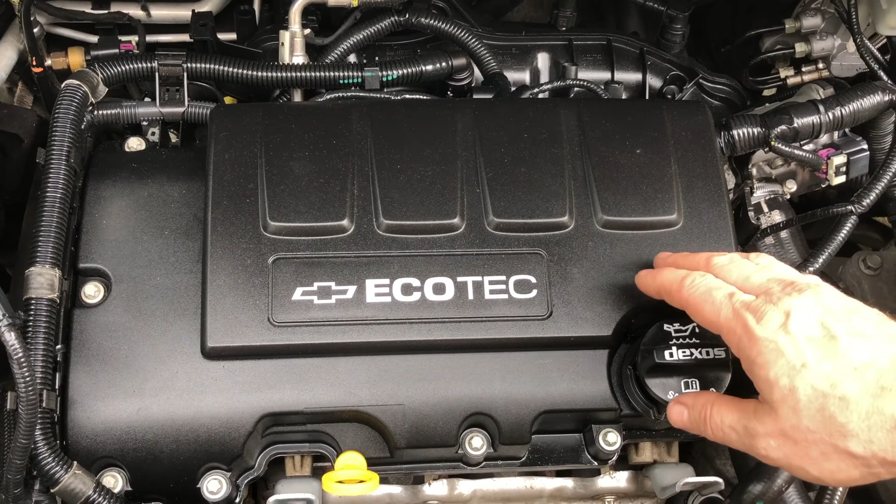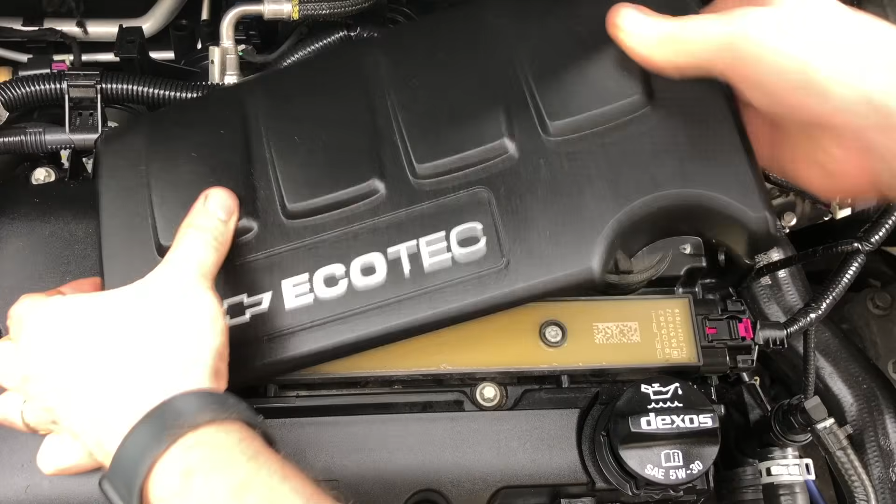All right, guys, today what we're going to be showing is the 60,000 mile maintenance interval on the GM Ecotec 1.4 liter turbocharged I4 engine. So most of that is about the ignition system. We're going to remove this decorative cover. It just snaps off. There's 2 snaps here and 2 snaps here. Hold on to these pins in these positions.

And then we're going to remove the Torx bolts that hold in the ignition coil pack. I believe those would be a, let's see, I want to make sure we got the exact size here. Yeah, that's going to be a T30 to remove that.

I believe this is probably the first time this particular engine has had this maintenance performed. It wasn't done at the correct interval. Once we remove these 2 guys, then we're going to remove the coil pack from the spark plugs.

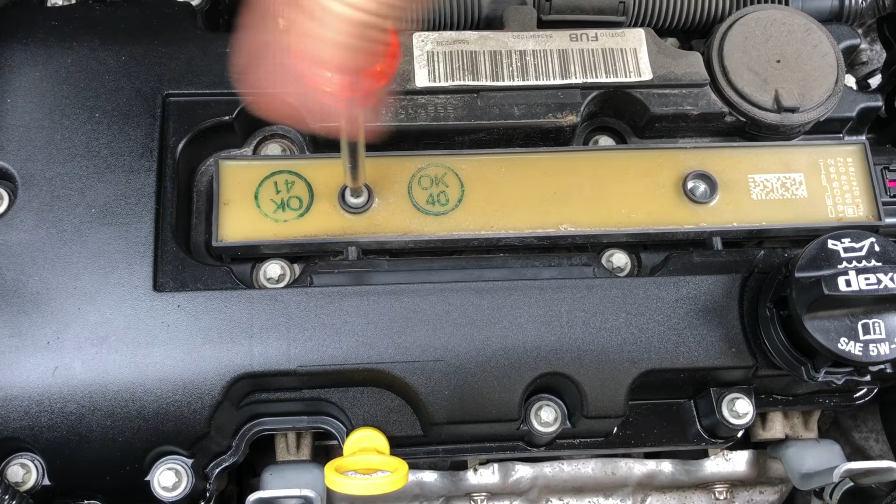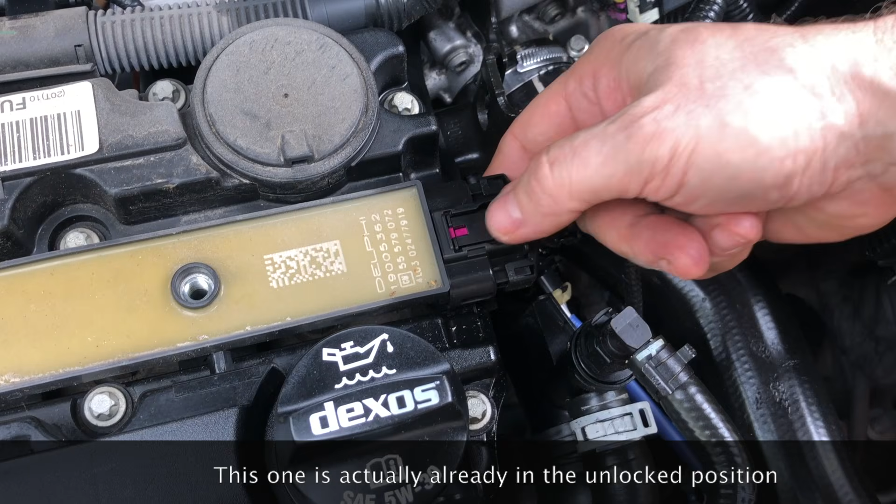Now, just to pull it up, you don't have to necessarily disconnect it. If you do need to disconnect it, there's this purple, and sometimes it's orange and sometimes it's red. This is a little lock pin that you push down, pull back, and that'll let you push this down and disconnect the wiring harness. But for what we're doing, we don't need to do that because we just want to be able to get access. To get access, grab it by the pack, don't grab it by the connector, and just wiggle it out.

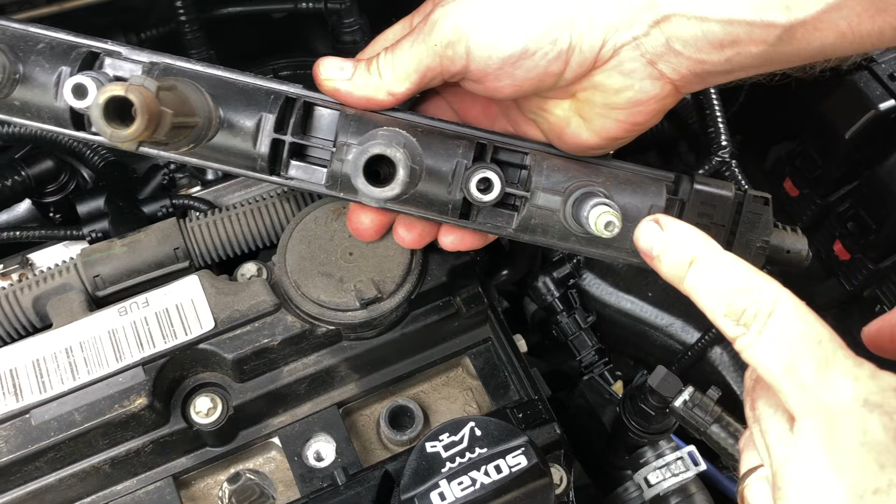All right, and we can see here what we're looking for is any damage to these boots. We got a little bit of rust going on here that we'll want to inspect a little bit. And then we can see here, this particular one's got a lot of corrosion, and in fact the boot stayed inside. It's really in there, so I'm going to have to get a pair of long nose pliers to pull that out. And then there's our spark plugs.

So first thing I'm going to do is I'm going to get some compressed air to blow out any debris before we go to remove any of these plugs. And then we're going to get a long nose pair of pliers, and we're going to gently remove this boot. All right, guys, I'm going to take just a flat pair of pliers that don't have any teeth. See if we can get this boot out of here. Yeah, didn't think so. She's wedged in there really good.

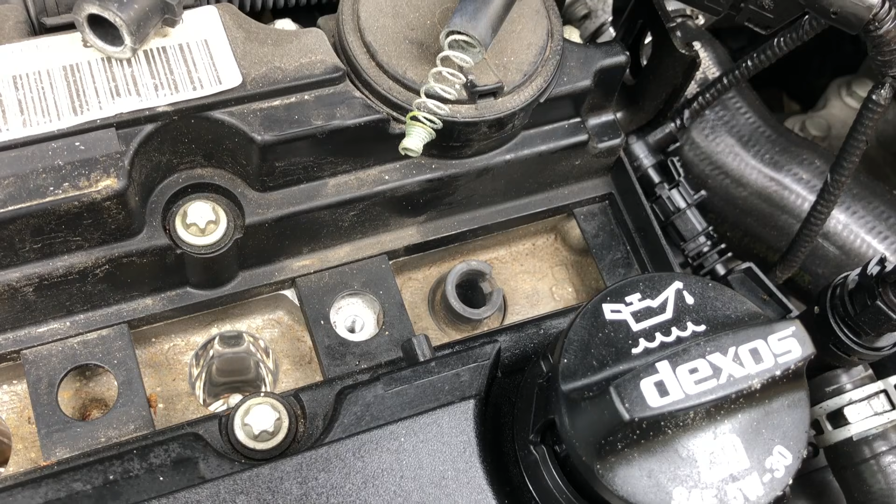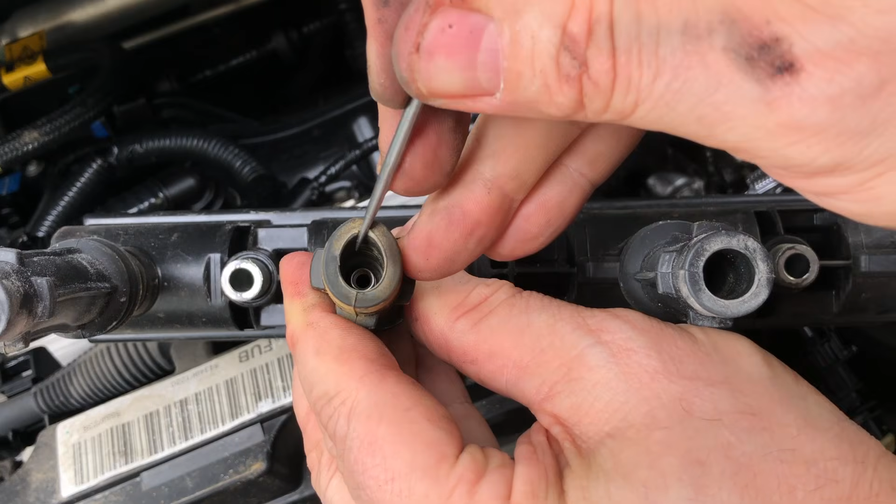As it turns out, I'm not too concerned about salvaging this boot because the corrosion that we see on this spring is pretty bad. Let me show you some more on that before we get into pulling that out. So if we take a look inside here, see how this guy's nice and shiny in there? That's how all these springs are supposed to appear, right? This one's kind of twisted up, but if we get him out, you can see there's a little bit of tarnishing on that one. That's not too bad.

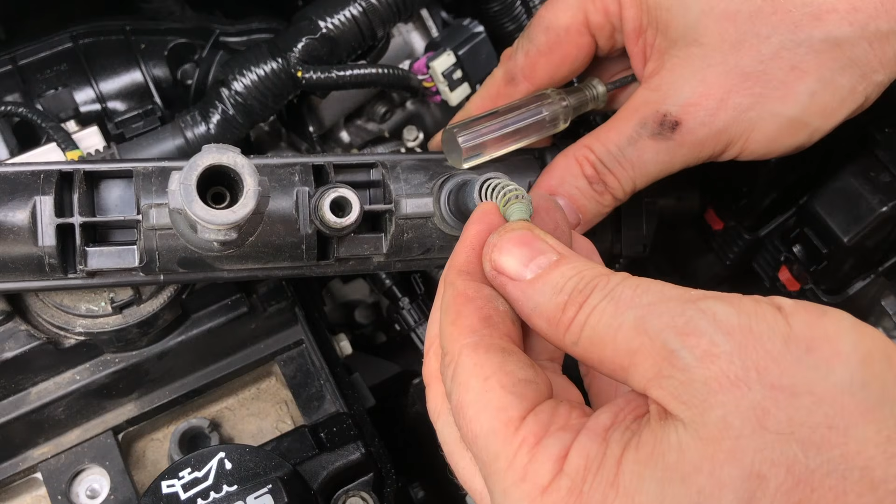This one also has got some tarnishing, but if we get him out where he's supposed to be, he's not too bad, right? But this guy here is really bad. He's really corroded up. So we're not getting a good connection. That may explain why occasionally this engine will get like a knocking. It hasn't thrown any codes yet, but again, that's why you do this kind of maintenance. So when you go in here to change the spark plugs, you want to inspect all these.

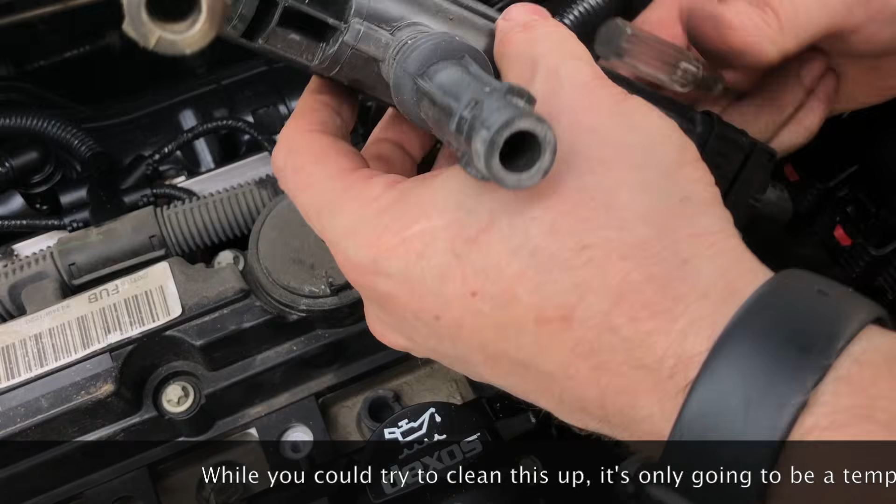Now, most of the time, there's no problem. You're just going to make sure that these springs look nice. They should look like this guy. But as long as they don't look any worse than this guy, you're probably okay. In this case, we're going to have to replace this coil pack because this is too badly corroded. That's part of the inspection that you do when you do this kind of maintenance. So this spring will fall out, that's okay. That would give you a way to clean it if you wanted to.

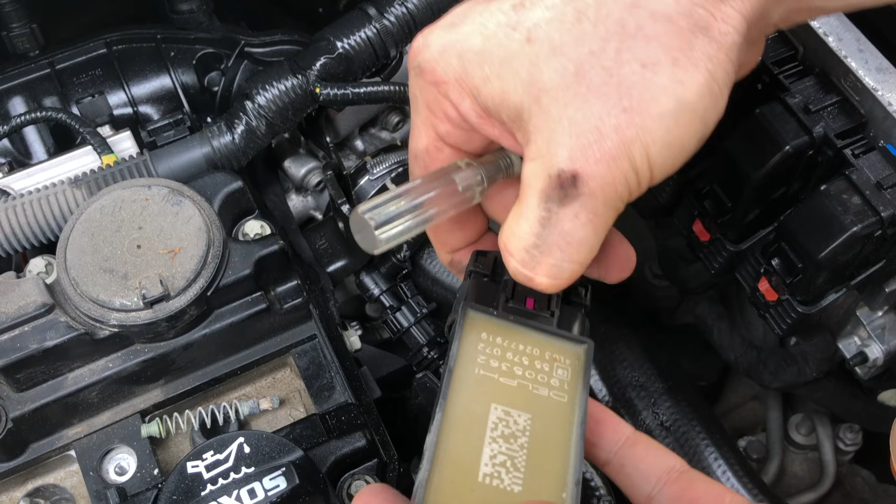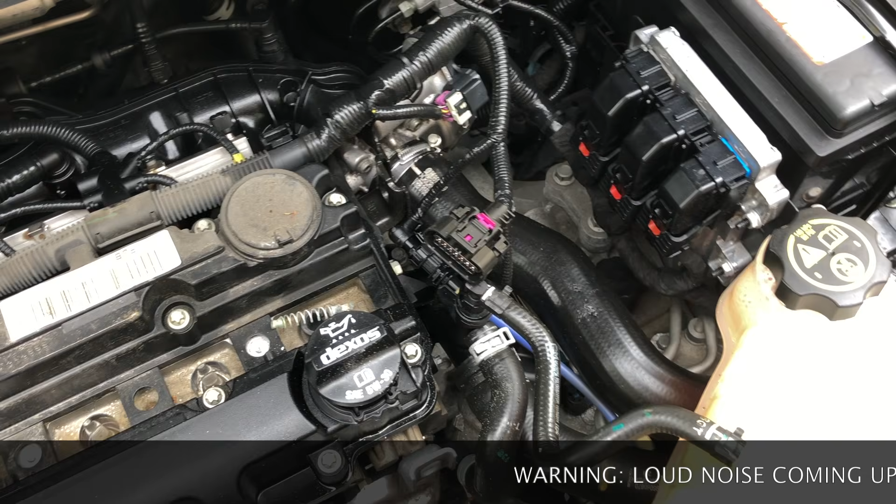In the previous picture, what we noticed was this lock was actually already out part way. So it should be in that lock position, but this whole piece can come out and we can replace it. And we'll show replacing that once we get through with blowing out the dirt. So now we're going to blow these guys out.

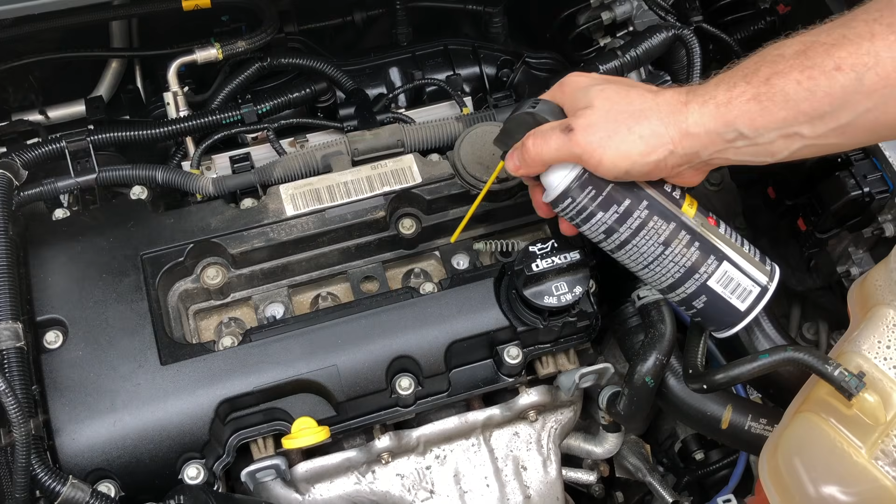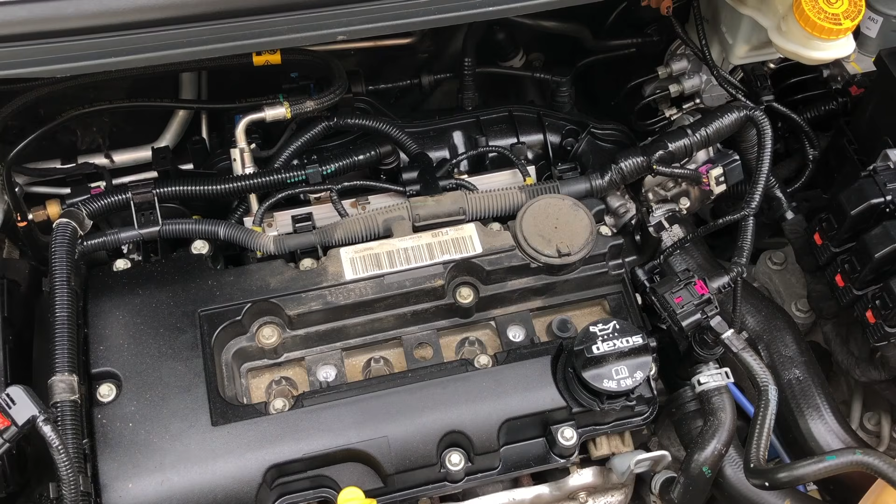To get these plugs out, you're going to use a 5/8 inch spark plug socket. And a spark plug socket has a little rubber grommet in there to hold on to the spark plug when it comes out. Now, I'm not going to necessarily show you removing all of them, but we'll take the first one out to show you what we've got.

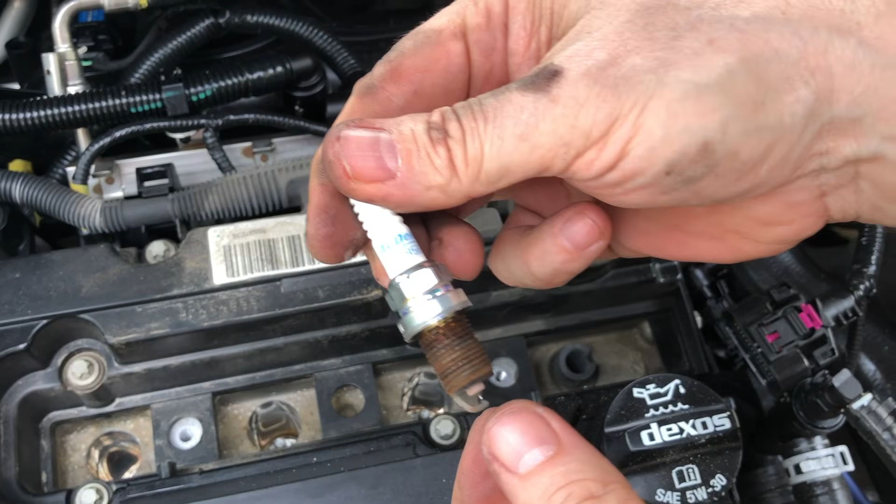What that grommet does is it holds onto these plugs. So this engine got pulled in here, so it's still a little warm. Well, we've got an ACDelco 41121 installed in here from the factory. If you have an older one of these Ecotec 1.4s, you'll actually find that the factory plug was an NGK, and that's just how it was originally from the factory.

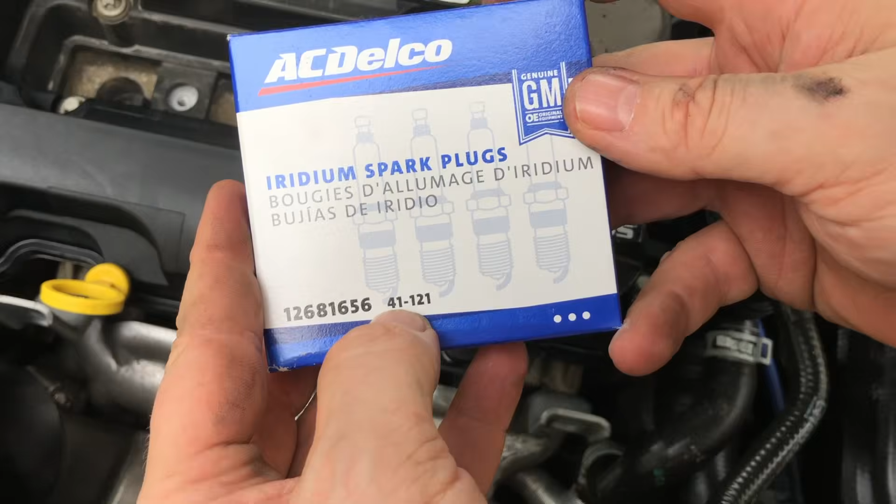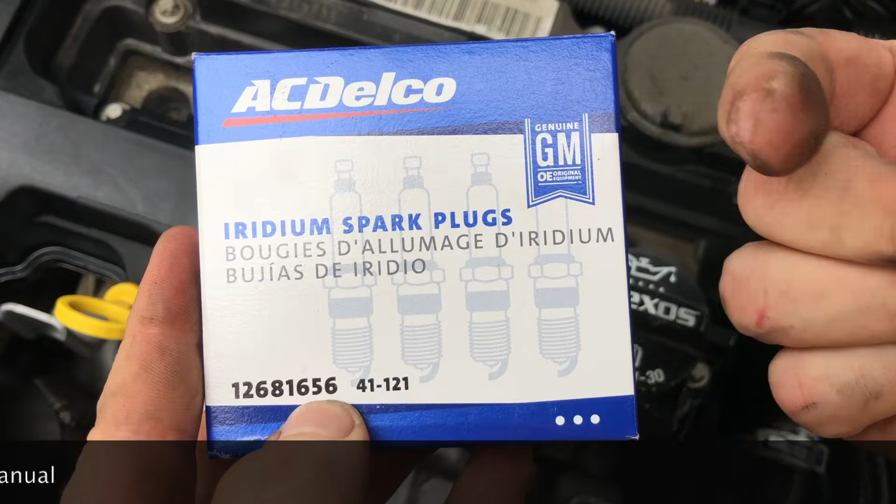So the replacement plugs that we're going to be using are still those 41121s. And you'll notice this is the new current ACDelco packaging for the GM parts, 12681656. At the time I'm doing this video, they got a good rebate going. You want to watch for that when you get these.

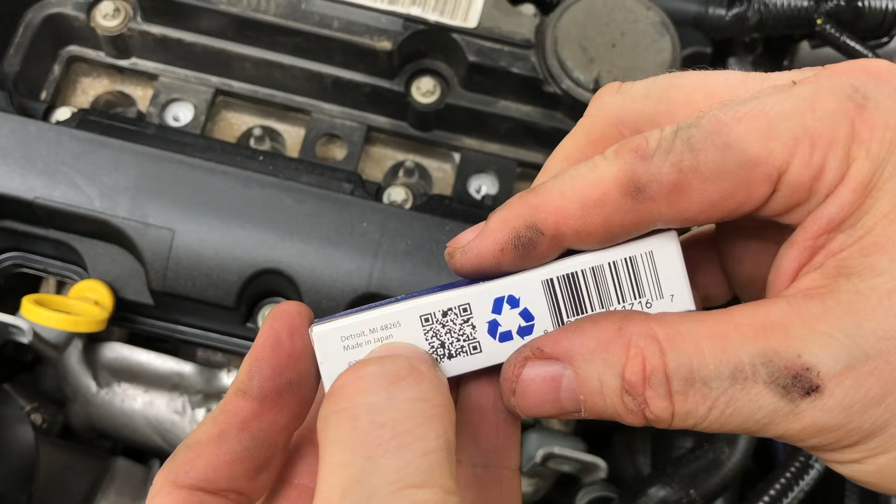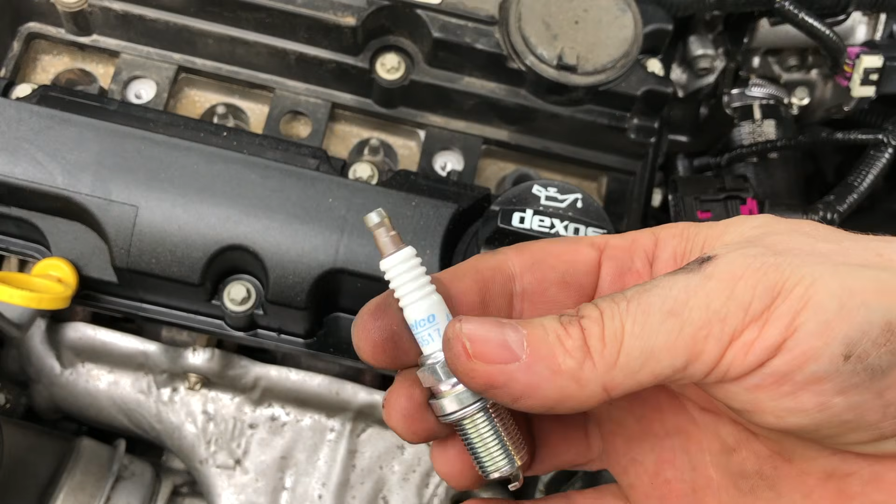But there will be 4 of them in the box. And these particular ones are made in Japan. They probably are made by NGK. You know, who knows? They're factory gapped, and the specification on the gap is from 0.6 to 0.7 millimeters. So that runs somewhere around 0.026 and a little bit up from that.

But here we have our same 41121s. So we're not going to have to gap these. We'll be able to install them as is. We're going to go ahead and install these 3 plugs. We're going to come back and finish getting this boot out, install this 4th plug, and I'll show you putting in the new coil pack.

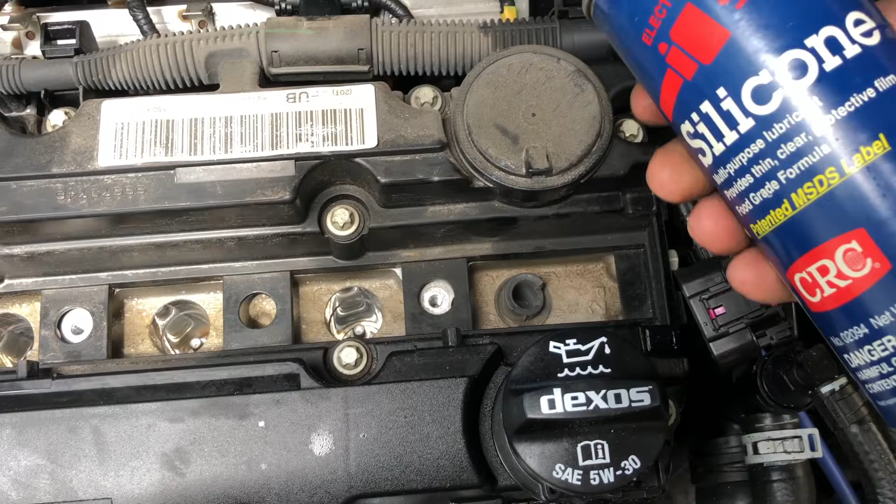All right, guys, we've got these 3 plugs done. We're going to come back here. What I'm going to do is I'm going to spray a little bit of all-purpose silicone spray in here. And what I'm trying to do is, the rubber boot here has adhered itself to the ceramic on the plug, is what I suspect. I don't want it to break off in there.

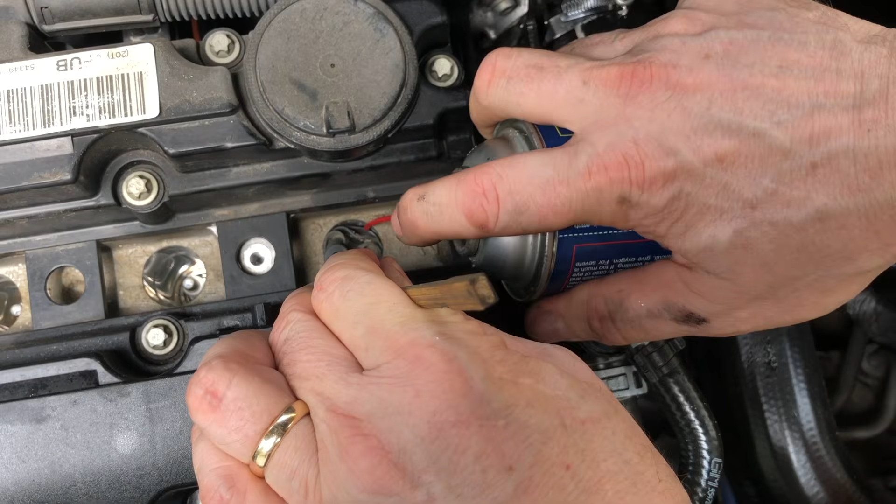We're going to be replacing this ignition coil pack because of the corrosion we saw. But we still want to try and pull this out intact if we can. Just going to work this guy around. Hopefully he'll let go. If he doesn't, we'll just have to tear him apart. Looks like what I'm going to have to do so that we can get the plug out.

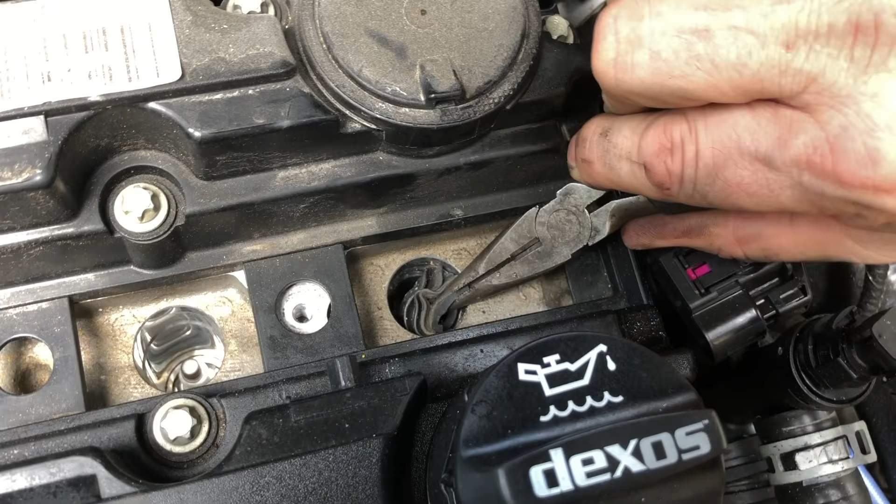Again, this isn't a normal situation to have, so the fact that we're having this is just another indication that we've got to do more than just change out spark plugs here on this particular guy. All right. So yeah, we've got a lot of it binding up down here. There it goes. We finally let go of it.

All right, so you can see there's a lot of corrosion on the plug itself. And then if we take a look inside the boot, we can see there's a lot of corrosion in here as well. So definitely all part of what was going on, and we obviously caught it before it got too far. So we're going to go ahead and give this guy a blowout.

Go ahead and pull this one, the last plug. We'll take a look at these plugs after we get them all out. Show you some things to watch for.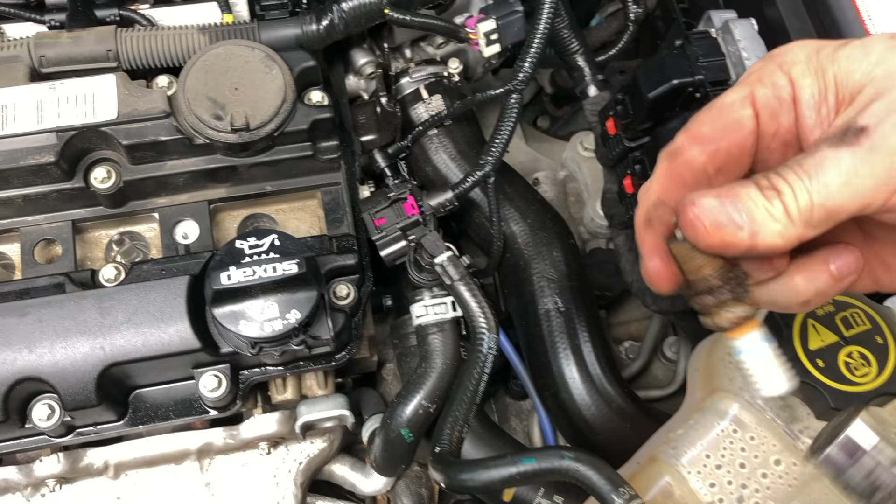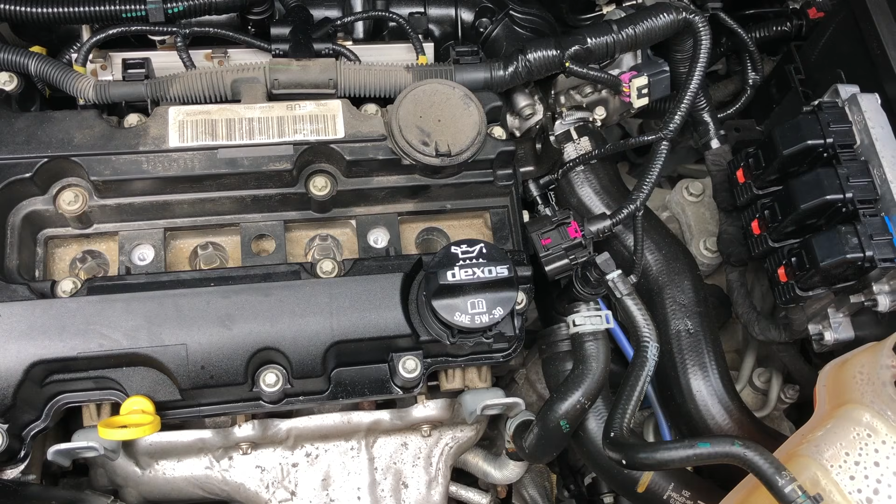All right, so yeah, there's a lot of corrosion on this particular plug as well as the corrosion on the tip. So eventually, if we had not come in here and did our regularly scheduled maintenance, we would have gotten to a situation where that particular plug would have started misfiring, and we would have gotten a check engine light. We would have had a code to chase to go deal with that.

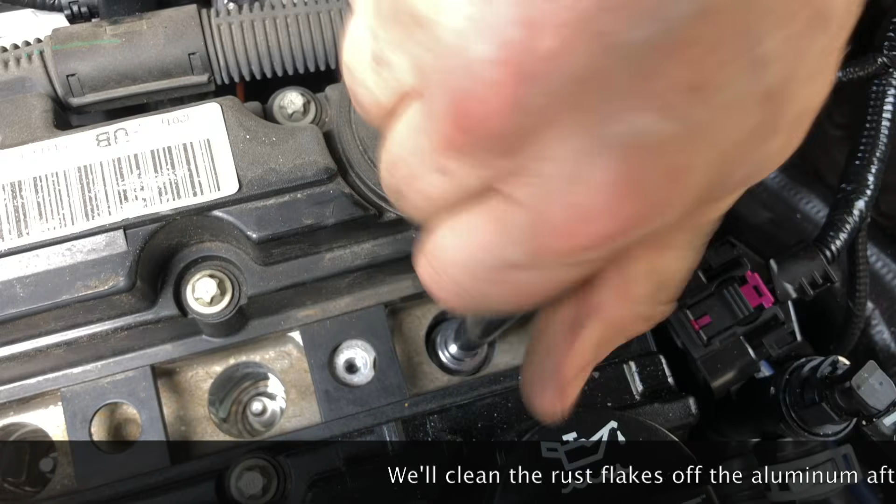Let's put in our last plug. So a lot of corrosion sitting around the outside edges there. Kind of hand tighten this guy in, and then what I'll do is, rather than just using the hand canned air, come in here and give it a couple of blasts of compressed air from the compressor as well.

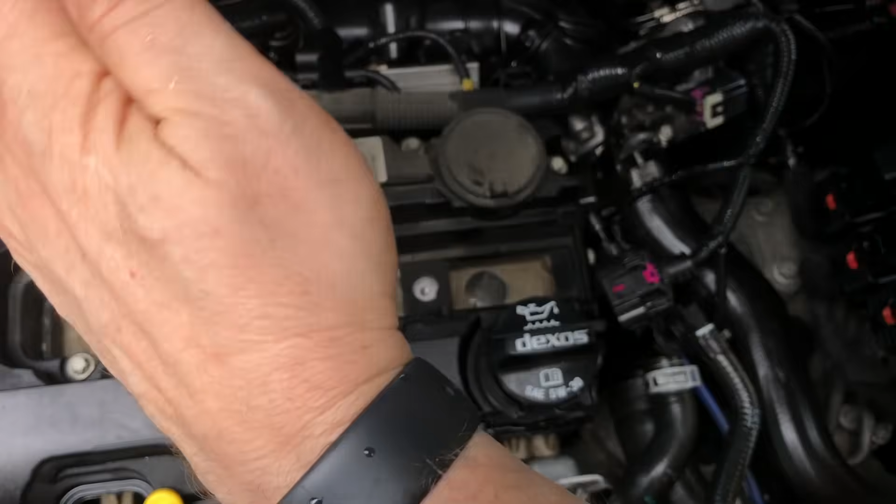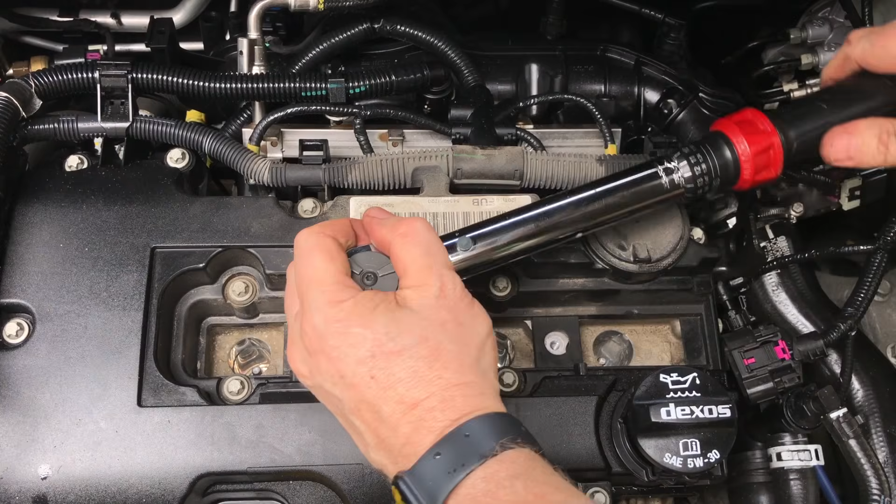Now what we can also do at this point is we can take our torque wrench and torque these guys down. These plugs get torqued to 18 foot-pounds. And remember, you got to torque these. You don't want to go too far because it's steel going into an aluminum head. That's all you want to do. All right, so we'll go here and torque these, and we'll come back and blow this stuff out and get ready to put the new coil pack on.

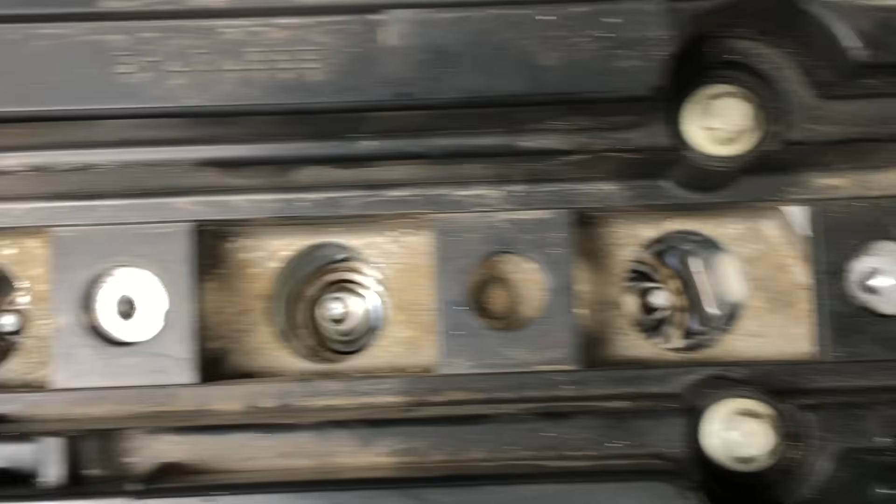All right, guys, we've got these cleaned out. You can see we've got the rust particles that were sitting in this bore, and we've also cleaned the others out. You got to remember, this is an aluminum head, so that rust is not on the head from the aluminum. It's left over from the spark plug and dropped down there.

What you can do is you can put some cleaner on the end of a Q-tip. This is one thing you can do. You can just kind of come in here with a pair of very long nose pliers and just clean around there. Get all that broken up, and then you come in with compressed air and blow it right out. All right, so now we've got that done.

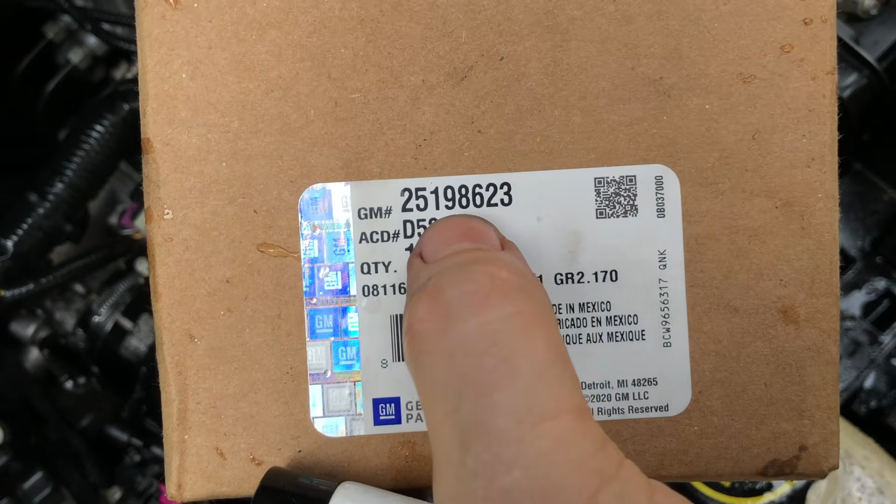The next thing we're going to be doing is putting on a new coil pack because of this problem. And the part number on that is GM 25198623, and that's a D521C from ACDelco. And again, this is kind of like in the new packaging that they're doing to stop all these Chinese counterfeiters, right? So if it's not got this kind of sealed tape, it's probably fake.

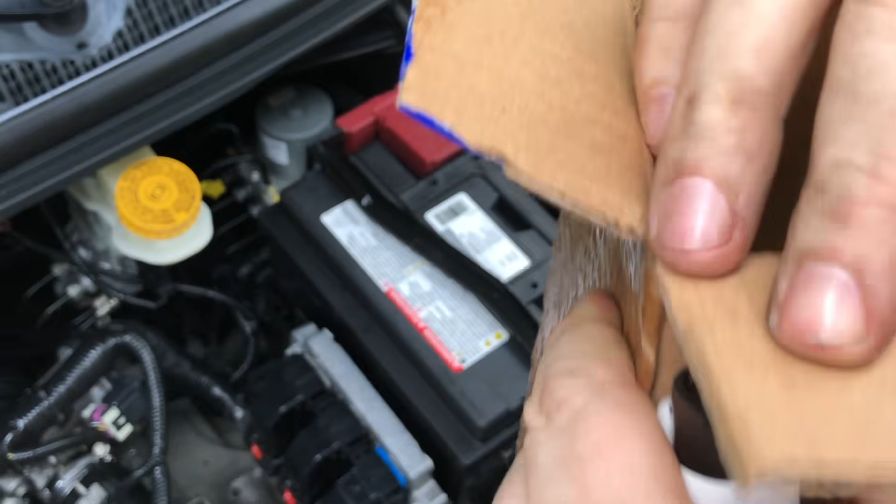Okay. It's starting to rain out here, guys, so bear with me, right? So now we've got this all pre-lubed up with a form of dielectric grease. It's all ready to go in and be installed. There's nothing you need to do. So that's what we're going to do now.

We're just going to get this onto each of the plugs. Push it into position. We're going to reconnect our harness, push our lock back in. We're going to get our 2 torque screws, reinstall them, and then we're going to retorque it down. And then what I'll do is I'll come over and show you a little bit closer on the spark plug inspection.

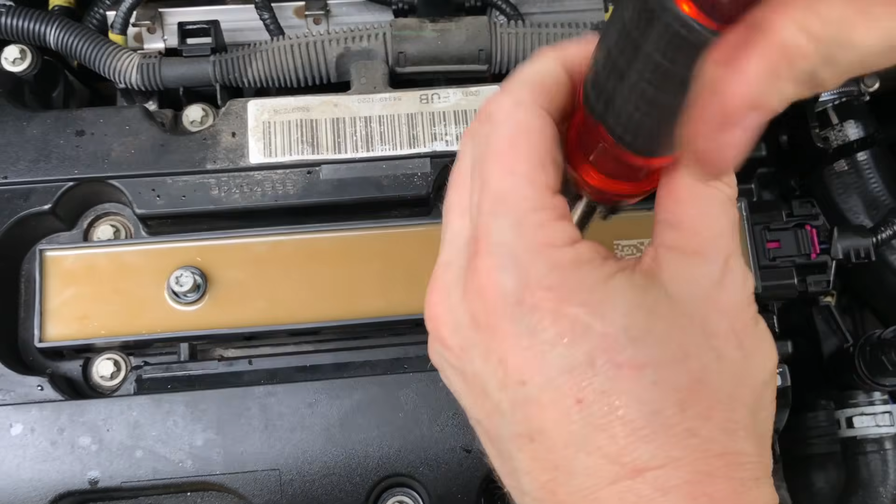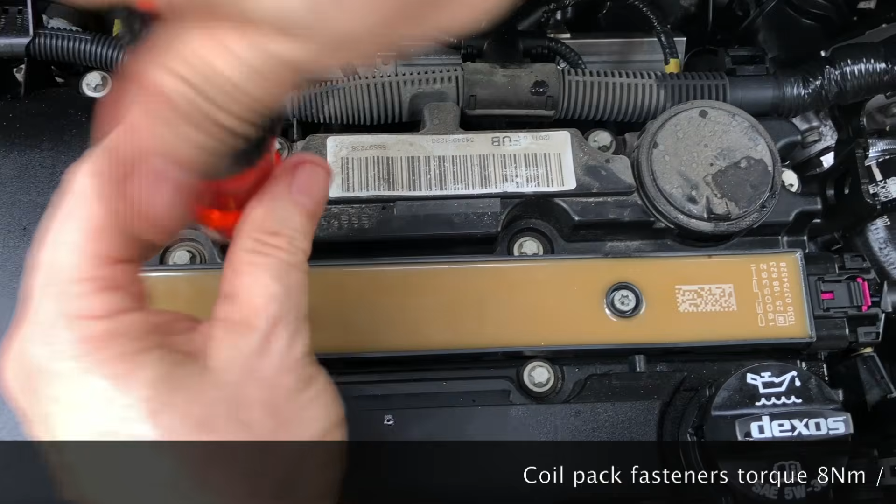I'm going to put these in by hand, just snug them up, and then we're going to torque them to 71 inch-pounds. 71 inch-pounds. And again, we're going into aluminum here, so it's a very lightweight specification. All right, let's just get that torque done, and then we'll go take a look at those plugs, and we'll take a closer look at that coil pack that failed. And most importantly, we'll get out of the rain.

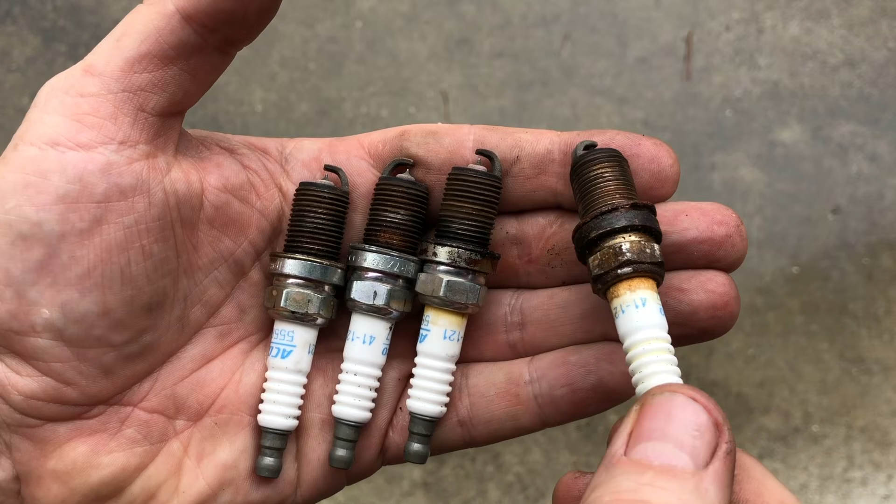That's 1. That's 2. Then you just put your cover on and you're done. Let's go take a look at the parts that failed. All right, guys, let's take a look at these plugs, right? So here's our guy that was at the end that was all rusty. And here's our guy at the far end that's in pretty good shape still. Again, these are all made in Japan, just like the ones that we replaced it with. So these are very high quality plugs. So there's not a problem with the plugs itself, right?

So when you take these plugs, you're looking at the tips here. If you got a lot of black, oily substance, right, that would tell you that you got a problem because that would be oil burning. Another problem would be a lot of white, flaky material on it. That would be another problem that the service manual can detail what might be the cause of that. These actually look fine on the electrode tips.

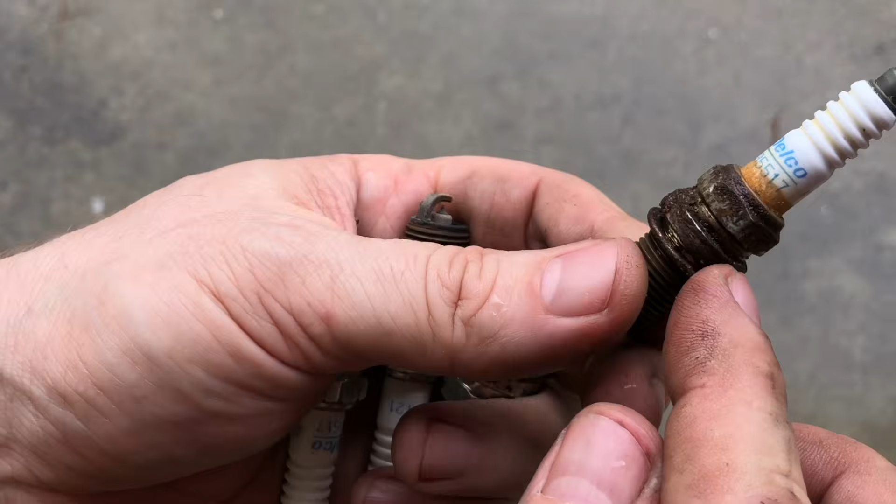It's the damage that we see on the housing of the plug, just heavily corroded on this one particular one. And that is likely whatever resulted in damaging the coil pack got down here moisture-wise and attacked the plug as well. So in some sense, we're lucky we didn't have a fight getting it out. If it had been an iron head, we probably would have had more trouble getting it out than an aluminum head. Let's take a look at the coil pack.

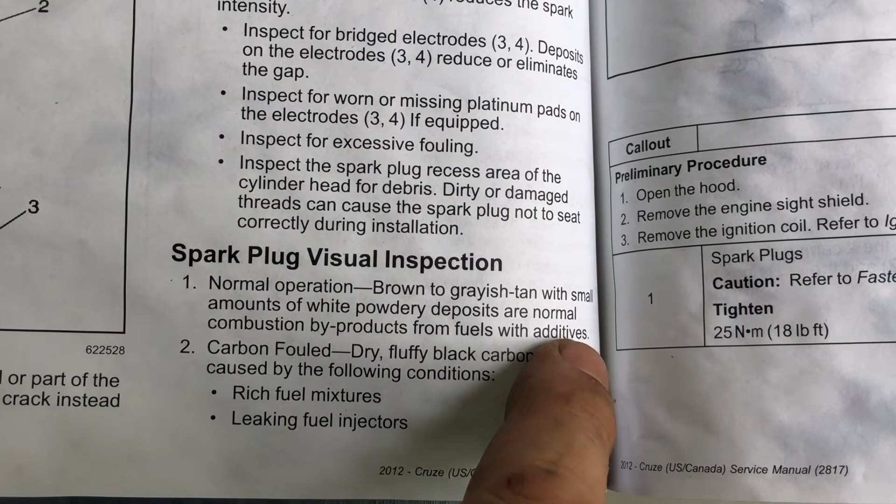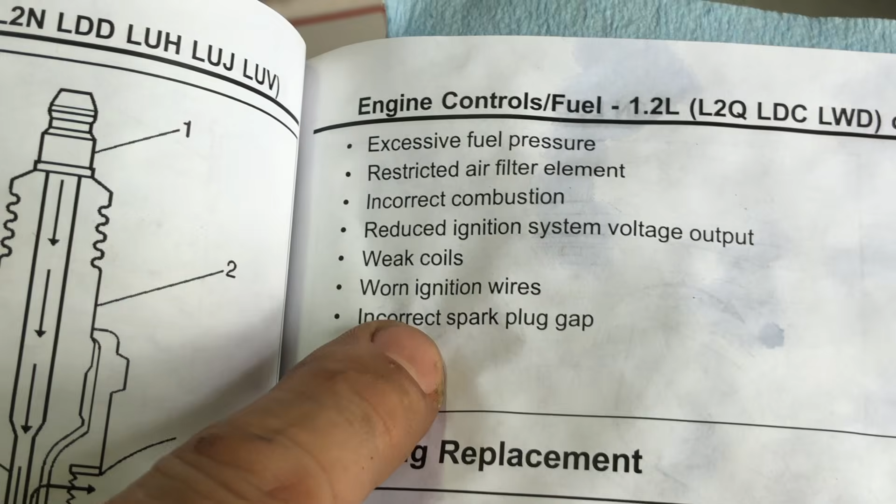All right, guys, so this is just a shot of the service manual. You know, it got wet when the rain started, but the end of those plugs, brown to grayish tan with small amounts of white powdery deposits. That's all normal combustion byproducts. With the carbon foul, you're going to have dry, fluffy black carbon or soot. There's a bunch of different problems that can cause that. There's just a long list, right? But so black is bad. And then deposit fouling, where you've actually got wet oil or coolant even if you've got a leak that is appearing on the end electrode. Those are all the different things you're trying to inspect for.

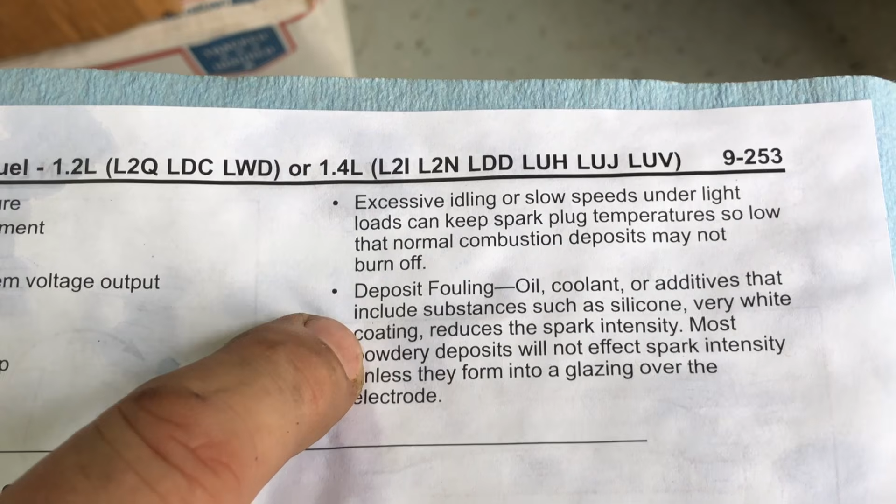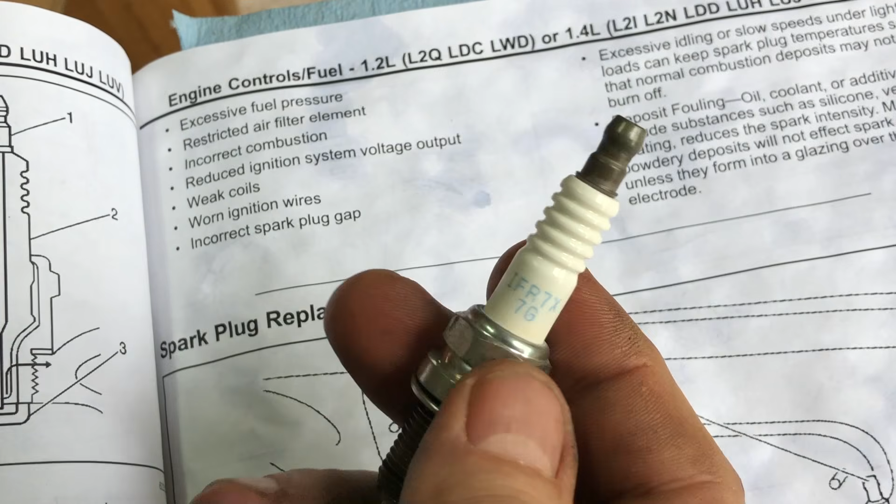I also mentioned earlier in the video that the earlier versions of this engine used NGK plugs. I happened to change out a 2012 Cruze ECO that had these in the 1.4 liter Ecotec. So that's what actually got installed by the factory. It was the first time I changed them out, and I replaced them with the same plugs that we saw today.

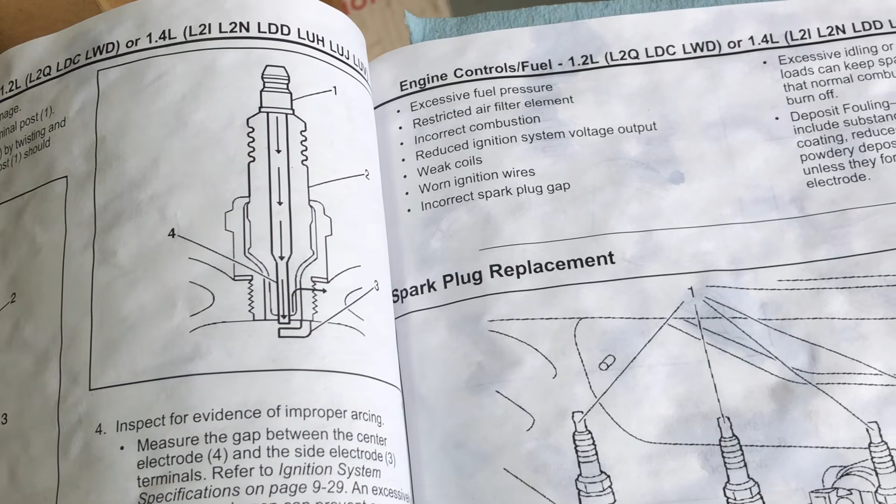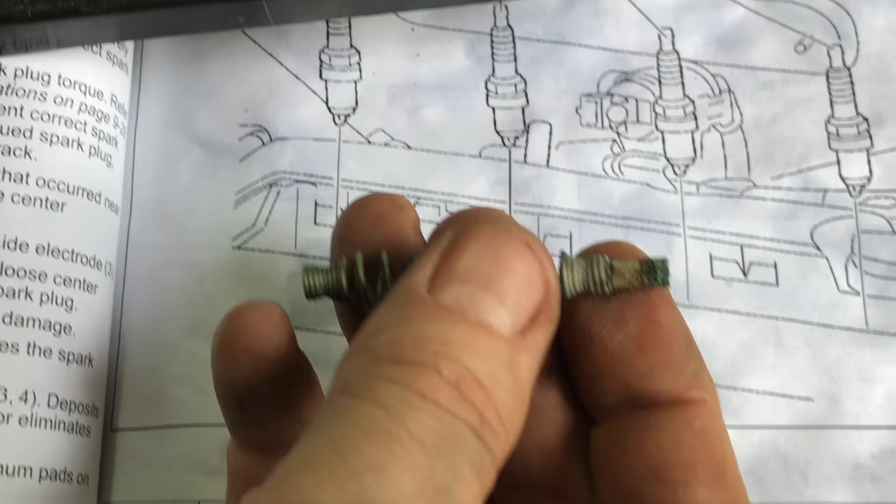And again, just taking another close look at our failed coil pack. You can see if you zoom in here, the corrosion on here is extensive. So we were just weeks, months away from starting to throw misfire codes on this particular cylinder here. So it was a good call to replace that.

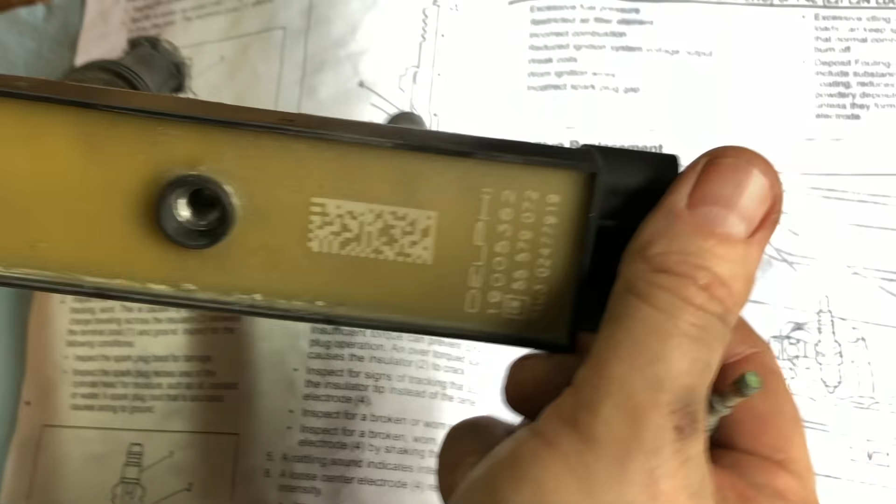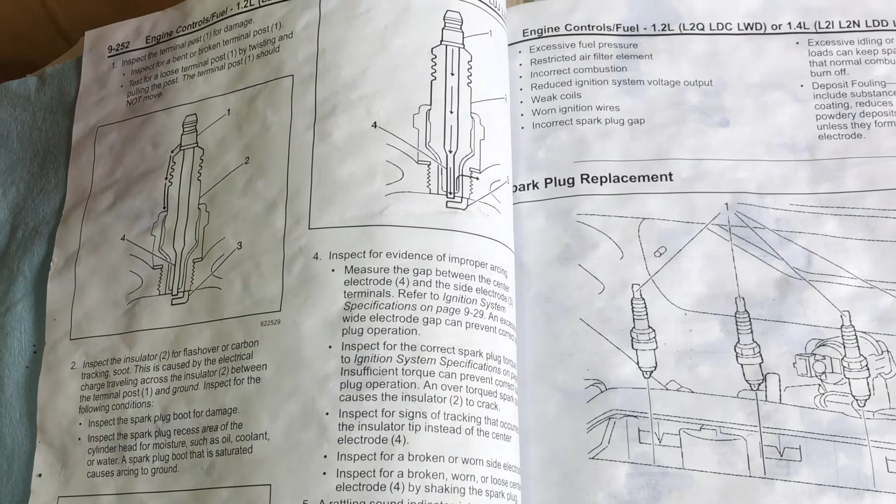Originally went in just expecting to show you guys spark plug replacement, and I wouldn't have normally even just filmed that, but because I anticipated this problem because of the knocking that the engine had, it turned out that it's a good reason to show why every 60,000 miles it's worthwhile to do these kind of inspections. And I'll post up here on the top corner of the video the inspection recommendation of GM.

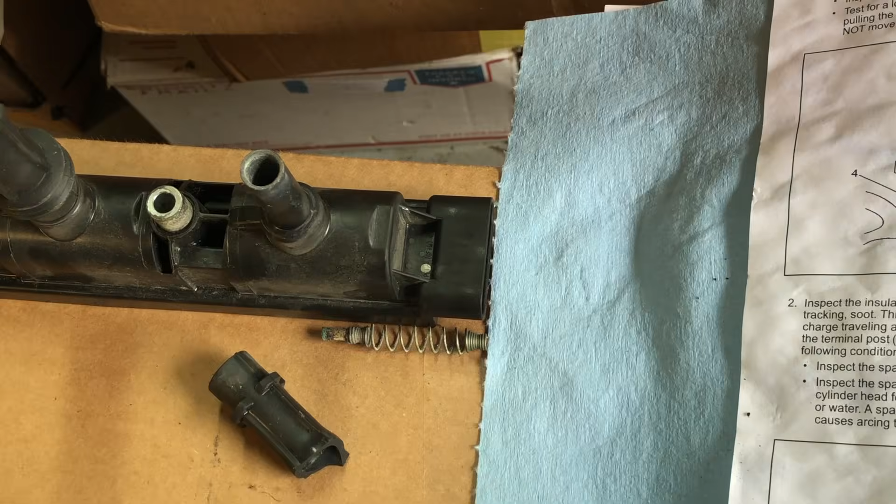Unfortunately, these 1.4 liters, they're not the same duration as the 1.8 liters in terms of when you're supposed to do this kind of maintenance. And GM didn't post it in the owner's manuals until 2013. So a lot of 2011 and 2012 owners don't even realize they need to cycle these things out a lot faster than the 1.8 liter. So I'll put that up there so you can have it.